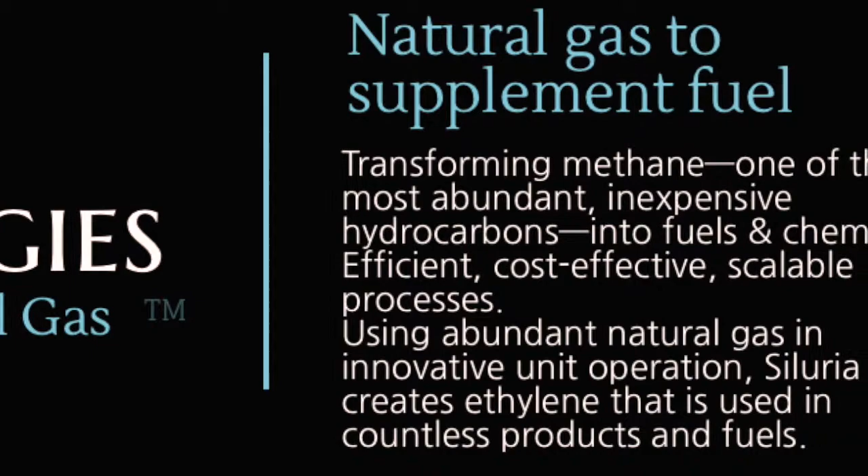Siluria Technologies is a company founded in 2008 that uses natural gas to directly produce ethylene. It uses natural gas and methane, one of the most abundant compounds on Earth, to produce fuel and chemicals with an innovative unit operation, the OCM, that will be discussed later.

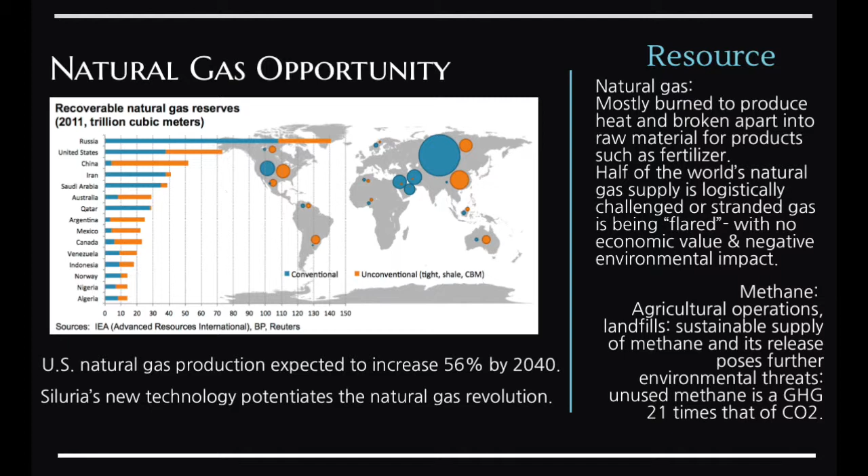Siluria takes advantage of the abundance of natural gas. It is predicted that U.S. natural gas production will increase 56% by 2040. Most of the natural gas produced today is used for heat or raw materials, and with a lot of the world's natural gas being logistically trapped by politics, utilizing natural gas for better purposes is the goal of Siluria. Methane is also released by agriculture operations, and its capture and use will be beneficial, as it is a greenhouse gas and its release into the atmosphere is very bad for the environment.

With headquarters in San Francisco, two plants in Menlo Park and Hayward, and a demo plant in Texas, Siluria Technologies is on the rise. The ethylene industry is huge, as ethylene is the most widely used petrochemical, for a market of $200 billion a year.

Today, ethylene is made by thermally cracking large amounts of ethane or naphtha, which is costly, long, ineffective, and requires extremely high temperatures. But Siluria uses a direct catalytic exothermic reaction with natural gas to produce ethylene.

To produce ethylene in a more abundant and efficient way, Siluria had to produce and try out numerous catalysts, about 70,000 in a couple years, while old strategies could only test one a month, and has found one or a group of catalysts that has produced desirable results.

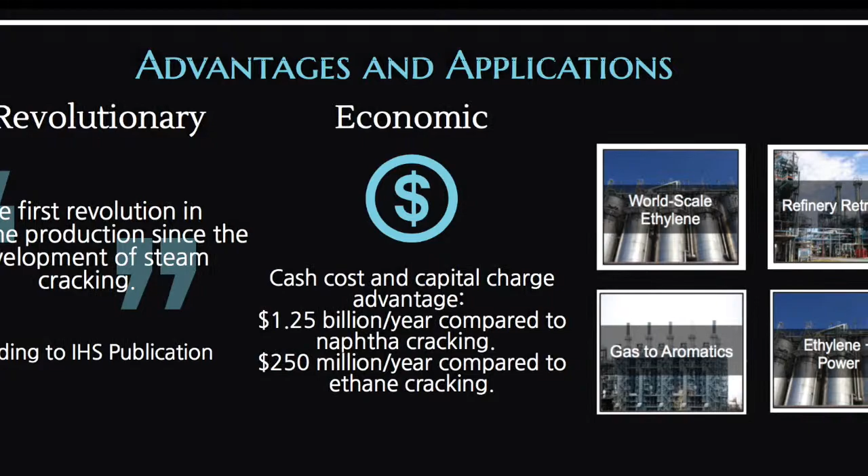Siluria has produced a revolutionary technology that has created much excitement in the industry, and its economic advantages are over hundreds of millions of dollars per year compared to cracking. Future applications include world-scale ethylene and power, and retrofitting refineries to better deal with natural gas.

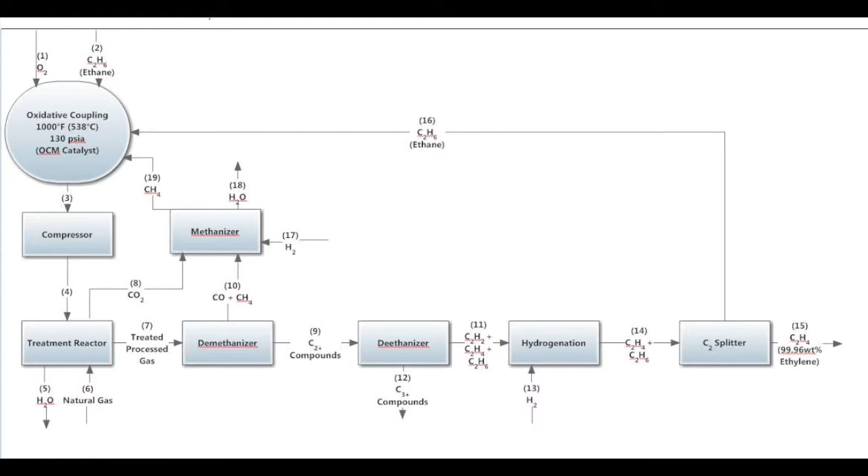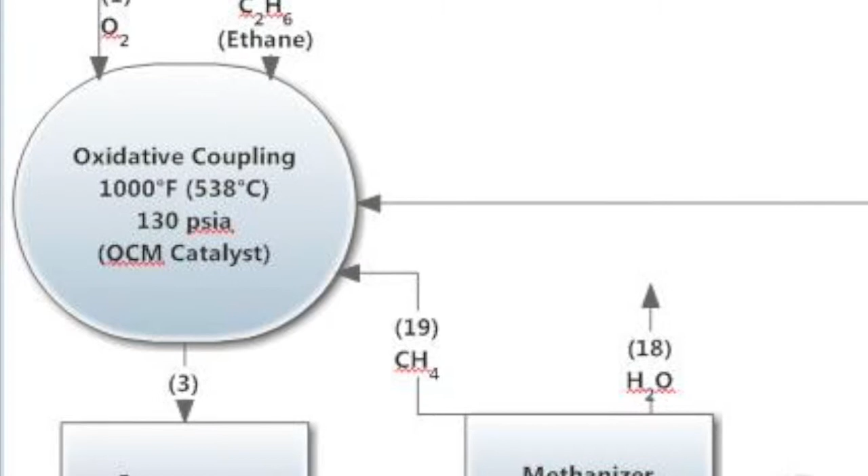This is the process flow diagram for the oxidative coupling of oxygen, ethane, and methane to produce ethylene at a very high purity. The first step in this process is to take oxygen gas, ethane, and methane and react it at 1000 degrees Fahrenheit, 130 psi absolute, in an oxidative coupling reactor with the groundbreaking OCM catalyst.

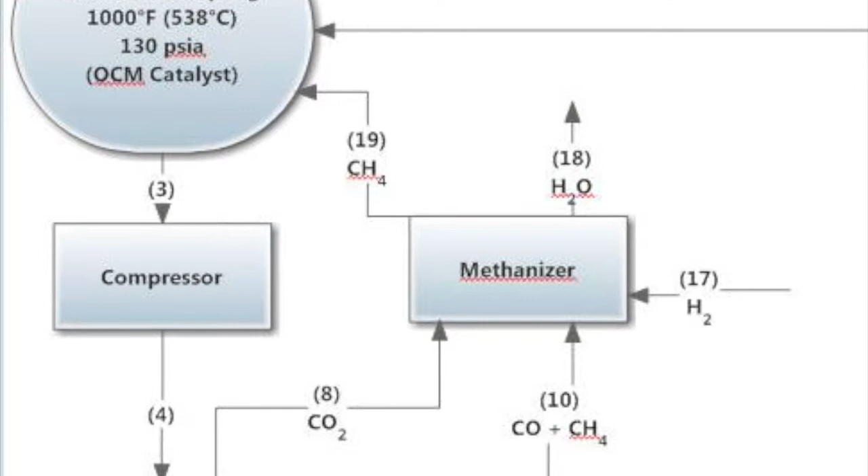The next step takes this effluent and puts it into a compressor, which then the compressed material is put into a treatment reactor with natural gases, and this reactor produces water as a waste material, carbon dioxide as a material to be used later in a methane recycling process, and the treated processed gas that is then put into a demethanizer.

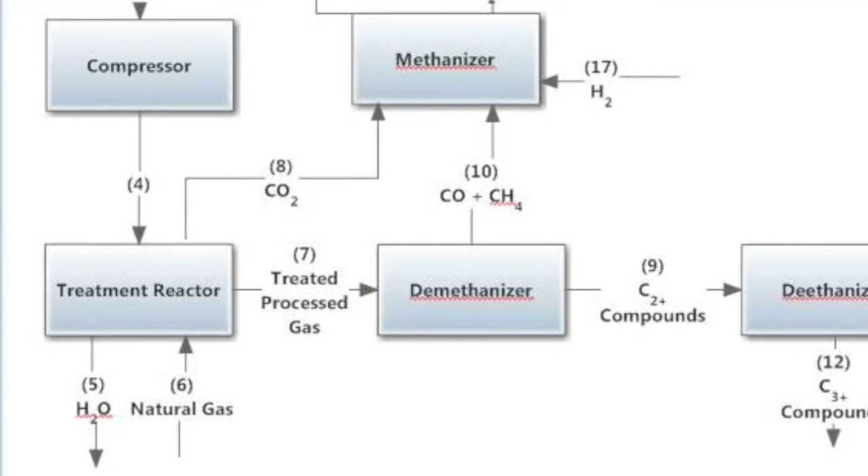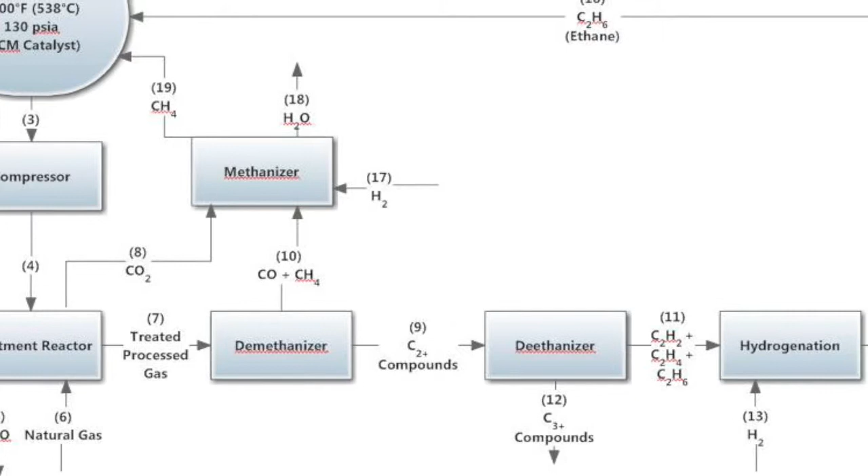This demethanizer produces carbon monoxide and methane, which goes back into the methane recycling process to be talked about later, and carbon compounds of length 2 or greater.

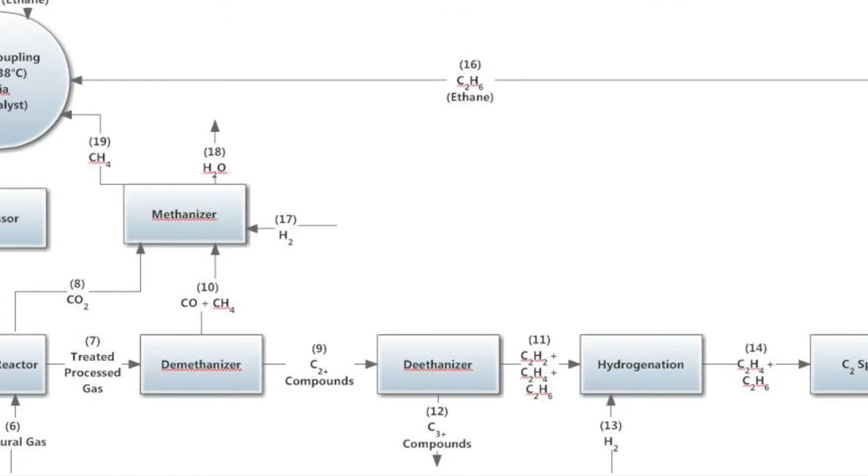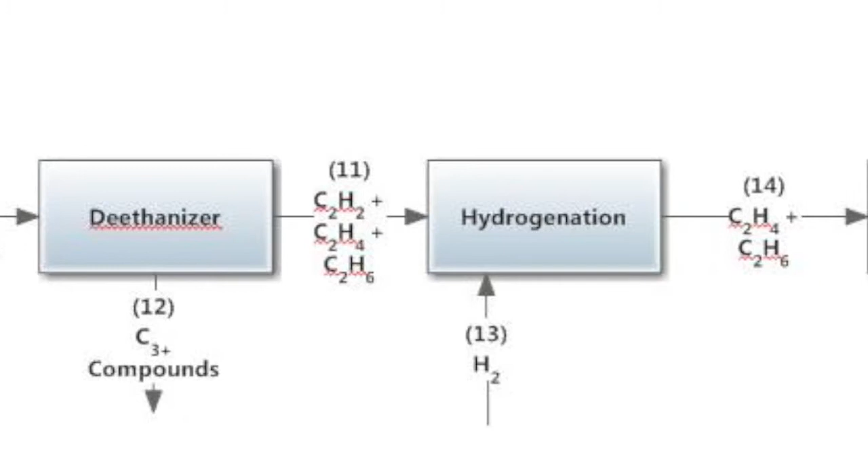These compounds are put into a deethanizer, which separates the 2 carbon chains and the 3 carbon chains. The 3 carbon chains and greater are later sold as other products for other purposes, but these 2 carbon chains, the acetylene, ethylene, and ethane, are put into a hydrogenation chamber with hydrogen gas, which produces ethylene and ethane.

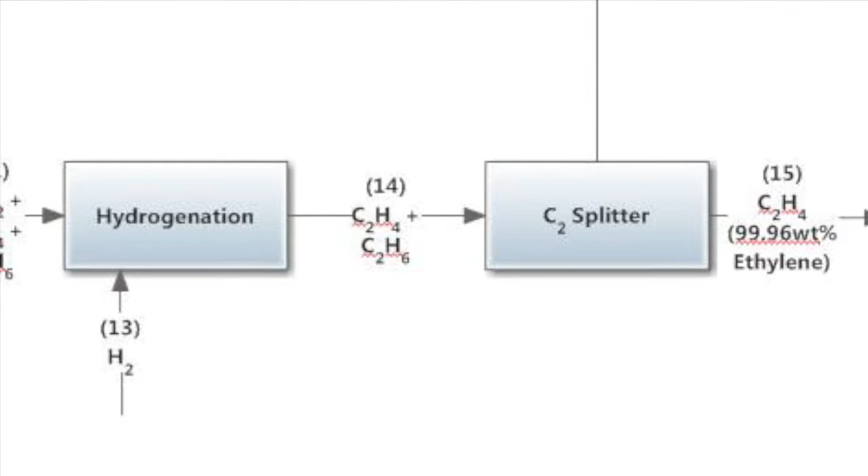These are then put into a carbon-2 splitter, which produces ethylene at a 99.96 weight percent product, which is why this process is so efficient. The ethane, which is removed from the splitter, is put back into the first step, the oxidative coupling reaction, as a new reactant.

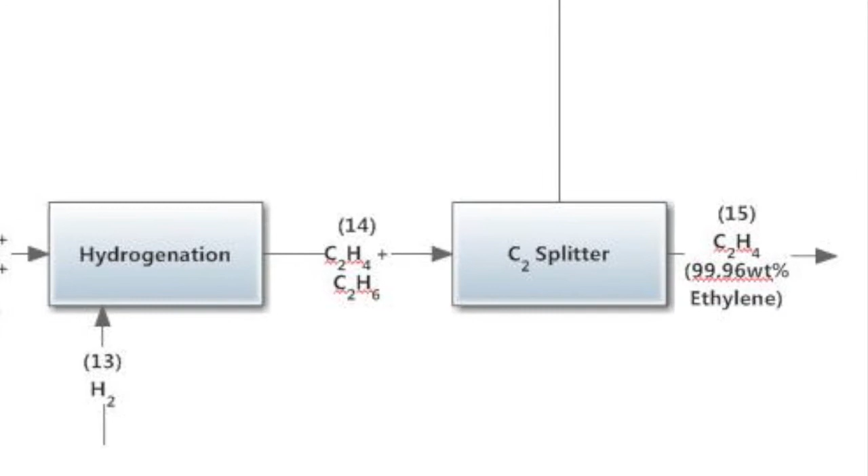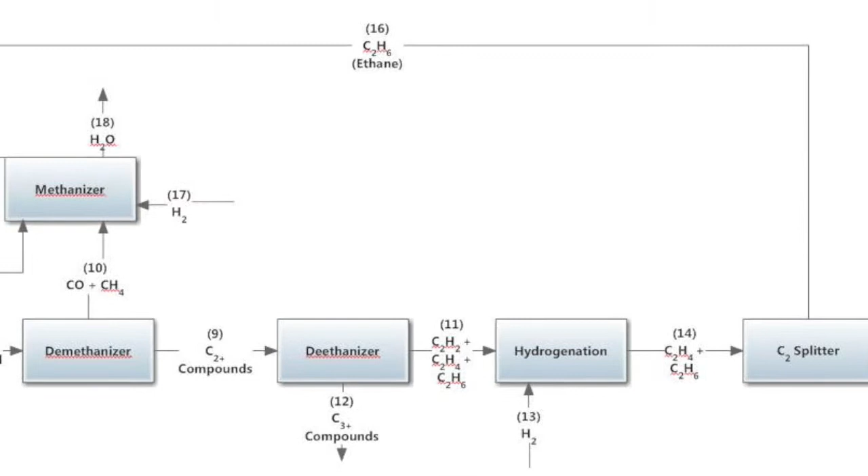Earlier in the process flow diagram, the carbon dioxide, carbon monoxide, and methane are put into a methanizer with hydrogen gas, which removes water as waste and produces methane as a reactant for the first oxidative coupling reaction.

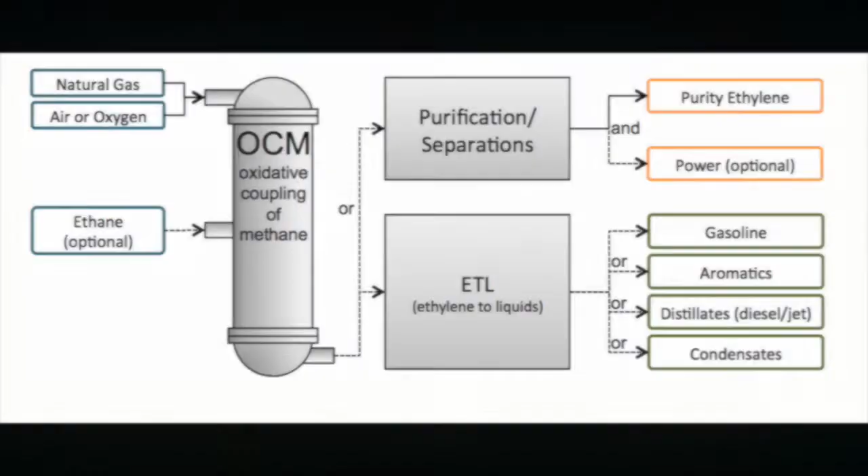The key unit operation is the oxidative coupling stage of the process. This is where other companies have failed in trying to create a commercially viable OCM process. While other catalysts are viable in terms of conversion and selectivity, they operate at temperatures that are very high and only last for several months, making them not commercially viable to use in the OCM process.

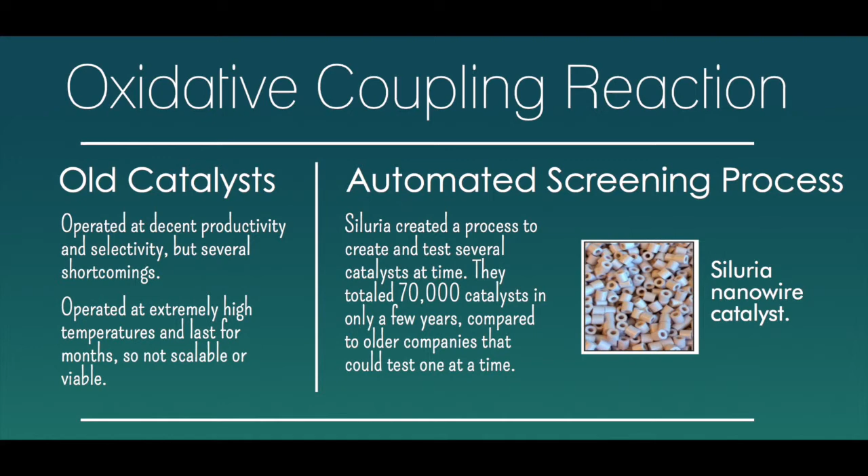What Siluria created was an automated screening process that allowed them to create and screen over 70,000 catalysts in only a few years, finally arriving at a proprietary nanowire catalyst. Their catalyst performs at temperatures several hundred degrees lower than other catalysts and can work for years on end, making the overall OCM process a much more viable process.